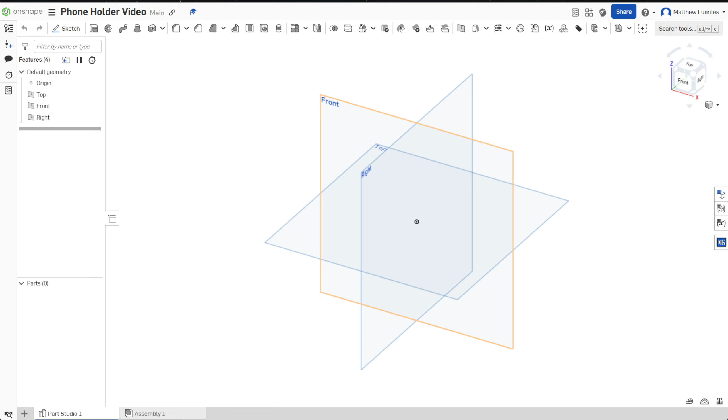But just know that I'm looking at my sketch as I'm making this. So what I'm going to start with is maybe this front plate right here. Let's go back over here, and I'm going to do a sketch on the front plane.

And I'm going to move this so I can see it. I made mine a rectangle. We could go back and edit this later, so we rounded off maybe the edges. But I'm going to start with a rectangle, and I could start with a hole as well in here.

So I'm just kind of sketching what I have there. You have to be a little careful that you don't add too much to your first sketch. In other words, we only want one enclosed area. If we have multiple enclosed areas that we're sketching in here, Onshape's going to get confused. So we want essentially one enclosed area per sketch.

I'm going to show you what I mean by that in just a second. So if you look here, Onshape actually doesn't know what we want to do with this. It doesn't know that this is a cutout. So essentially, I'm breaking that paradigm. If I draw this sketch and I have the cutout in there, it doesn't really know what's the cutout and what's the thing that you want to extrude.

So instead of adding a cutout in there, I'm just going to Control Z and remove that sketch. I'm going to start with just my blank rectangle, and then I'll add the cutout as another sketch in just a moment.

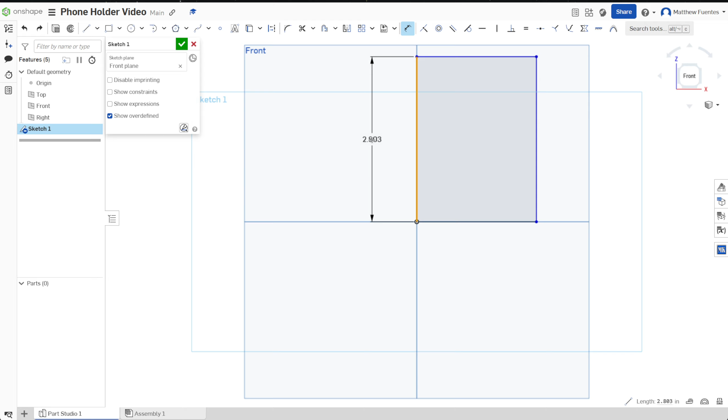So let's add our dimension. I'm going to click the left side. I'm going to move this over here so I can see it. We're going to make this an overall of 4 inches. And I'm going to make my width of this 2.5 inches.

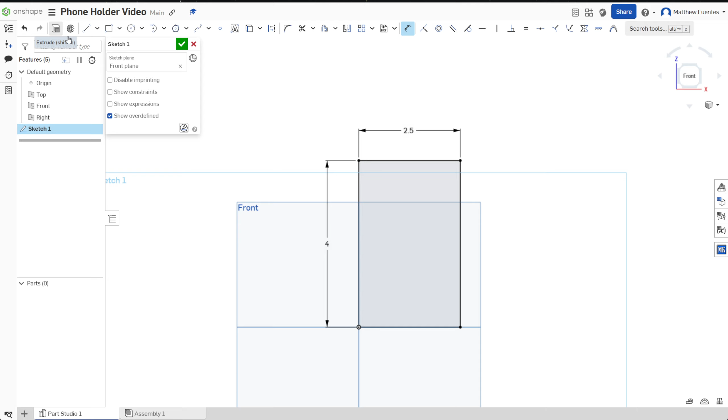Excellent, and I'm going to go ahead and accept that, or I'm just going to be a little bit quicker on it, and I'm going to click extrude. It's going to take that sketch and start the extrusion. Right click and rotate so I can see it. I want it to go back because I want my front plane to be the same, everything to be referenced off that front plane.

So the depth here—this is where I need to think about the plywood that I'm using. I'm going to use 1/8 inch plywood for the laser, so that means the thickness of this is going to be 1/8 of an inch. You don't have to do the math there, you can actually just do 1/8.

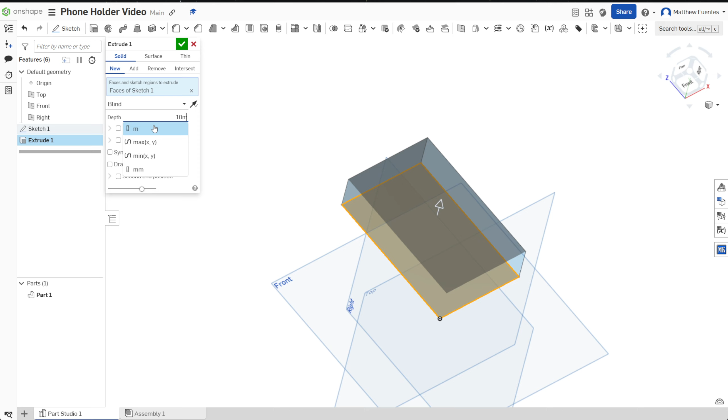If it was in millimeters and you knew the metric, you could actually type 10 mm and press enter, and it would do the conversion for you. That's pretty cool. This is not in millimeters, this one's going to be in inches, so 1/8 of an inch. You could even type the inch there, but I'm just going to do 1/8 because I know it's defaulted in inches.

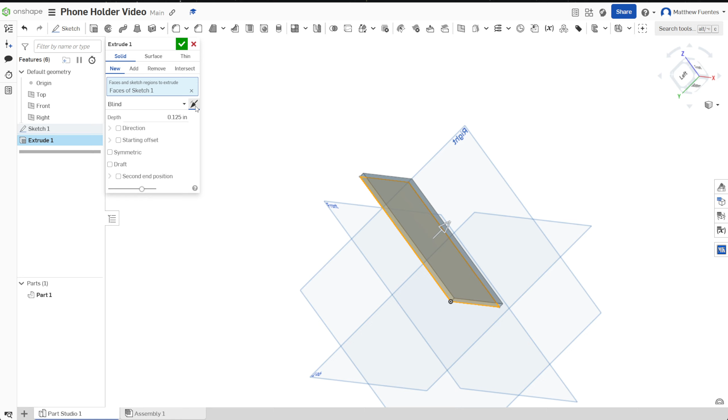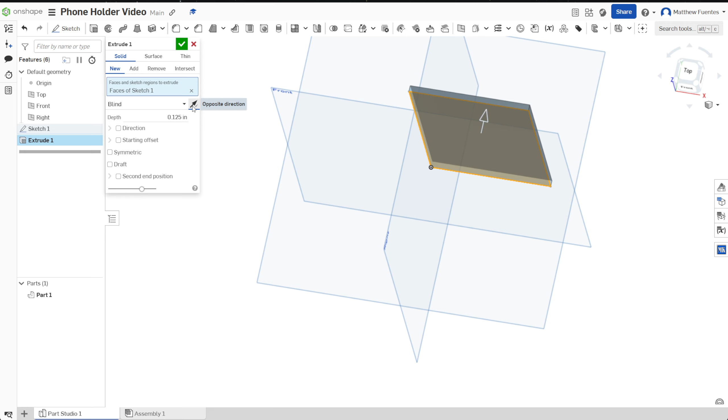Go back, there we go, select it. There it is. Actually I lied, I said that I wanted it to go back, and then I changed my orientation and messed it up. So I'm going to right click on this extrude, edit, change the orientation, click the check. So if you ever need to edit these particular features, you can just right click on them and change them.

So now I want to put a hole in here, basically put a slot. So we need to add in our slot that we've designated right here. So let's do that—I said it's 1 inch from the bottom, and about 1 inch wide is what I specified. So let's see what that looks like.

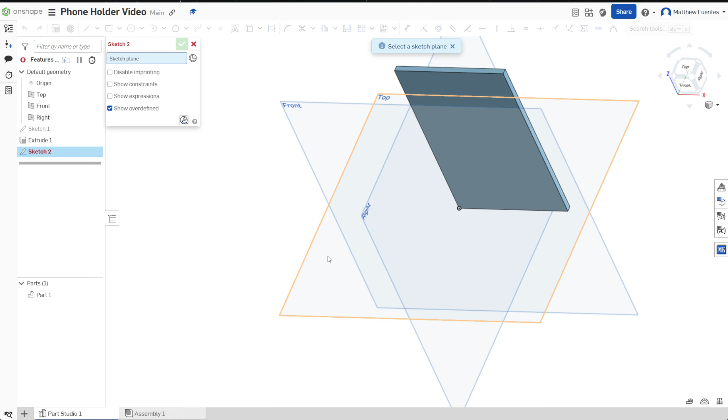So I'm going back here to my sketch. I'm going to actually sketch on the face of my phone holder now. So I'm no longer selecting one of the planes, I'm going to actually select the part to sketch on, and change my view. I'm going to click on the front so it makes it nice and flat for me. And I'm just going to put a rectangle in here.

Just going to throw it down. I didn't pick a location, I didn't pick a dimension, I'm just kind of getting it oriented, and that's going to be my cutout. So one of the things that I already know is that the thickness here will be the same thickness as my plywood, so I'm going to just say that's 1/8 of an inch and throw it in there.

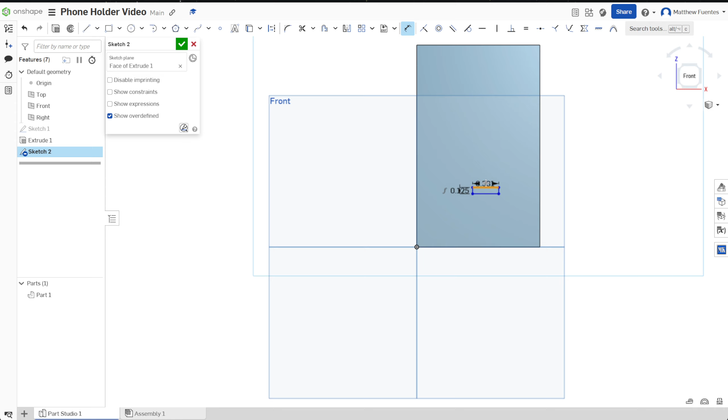I know that my width here is going to be 1 inch, according to what I wrote. So you're probably trying to figure out, okay, how do I get this nice and centered? There's several ways to do this.

In this particular case, it's a bit tricky because we've got this rectangle in space, and the reference is that we want this to be centered on this shape. If you notice, there's a little dot that shows up at the midpoint whenever I hover over this line. So what I'm going to do is make something called a construction line, which helps us in constructing our sketch.

I'm going to go to the line tool, and I can turn on the construction line now, or add it later. Let's turn it on now. I'm going to hover over until I get this little square, which means I'm at the midpoint. You notice in the black icon, it shows me that I'm at the midpoint.

I'm going to drop a line vertically down to the next midpoint. That construction line also has definitions, just like any other line in the sketch. This particular line is fully defined because it's in black. So you're probably thinking, okay, cool.

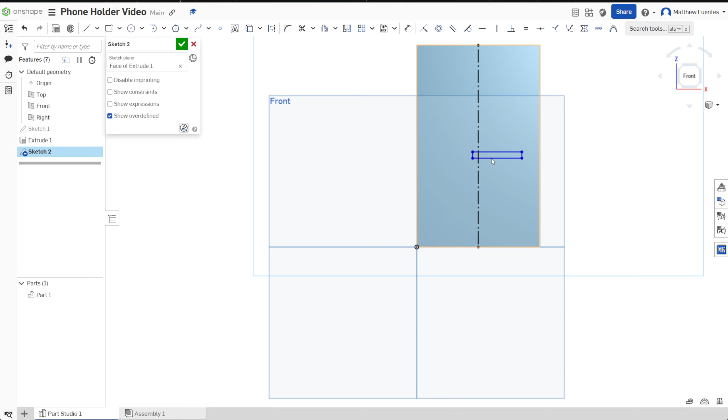So then I can take this rectangle and move it so that it sits at the midpoint. Well, not quite. We can do this a couple different ways. I'll show you one way.

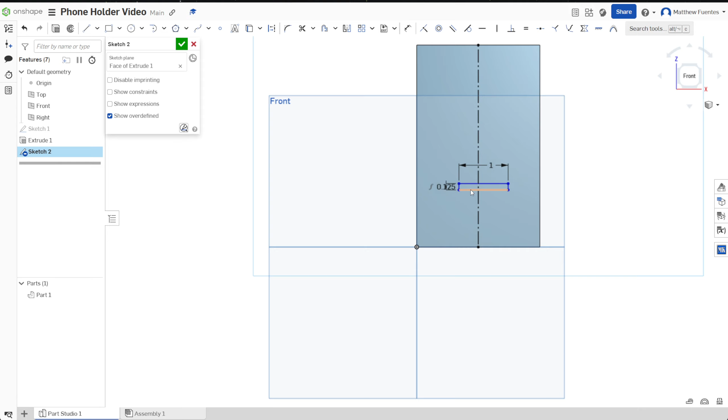I'm going to move this dimension over here. It's bothering me that it's not sitting on the dimension. So one way we can get these two center lines to match up is to think that we want the center line of this rectangle to match the center line of our overall rectangle. Let's add another construction line, center to center.

I pressed escape, and what I'm going to do is click one of these points. Let me zoom in here for you a little bit. Either one of these points or the line—I'm going to click one of the points and drag it until I get this.

See how it changes color? It goes to that kind of yellowy orange color. That just means it's snapping to that, so the point gets connected to the center line. Look what happens when I do that.

Now I'm going to see my constraint. Remember, blue means it's underdefined, so it means we're missing some definitions on defining its location or lengths of stuff in our sketch here.

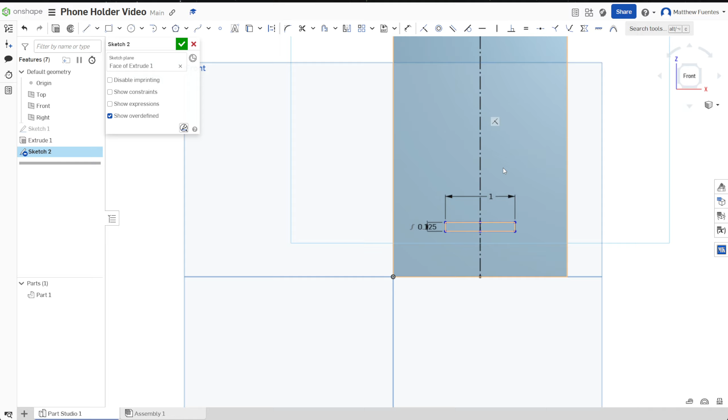So I'm dragging the part around to figure out what's not defined. I can't move it side to side, and I can't change the shape by clicking the corners. But if I click any of the points, the only thing I can do is move it up and down. So I've defined that it lives centered in this particular rectangle, but I haven't defined where it's sitting at.

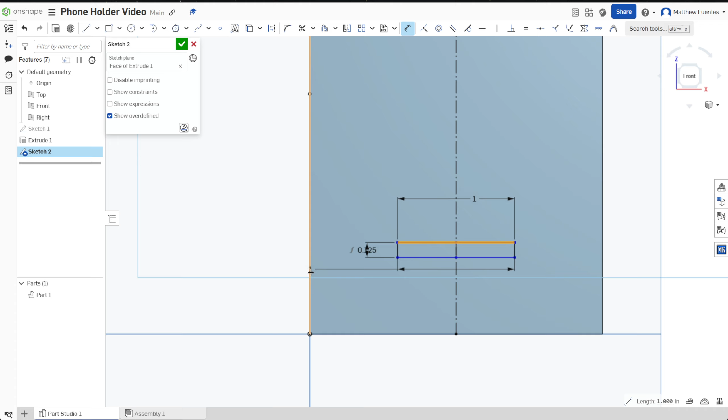If you go back to my original sketch, I said I really want this to be about 1 inch from the bottom. That's what I'm saying down here. So let's do that. My intent is for the bottom of my phone, which is right there, and the bottom of this to be about 1 inch. About 1 inch—there we go. It looks about right. We might want to change that later, but we'll come back to it.

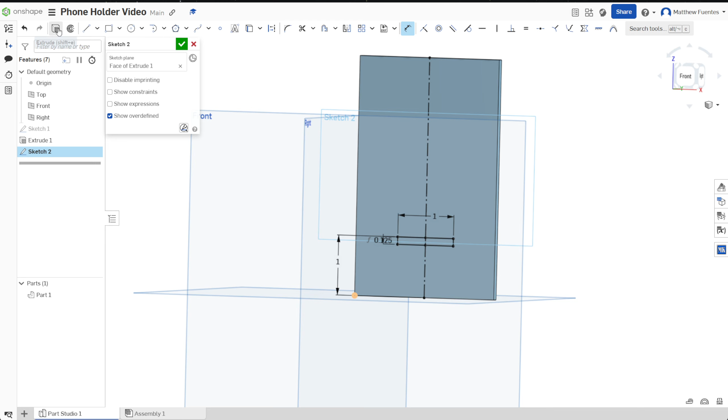Let's go ahead and I'm going to extrude, but this time I don't want that because I can't laser an extra part out. Maybe if I were 3D printing, I would want this, but I'm thinking with a laser, I need to connect things together. Instead of a little lip that sticks out like that, I'm going to make a cut.

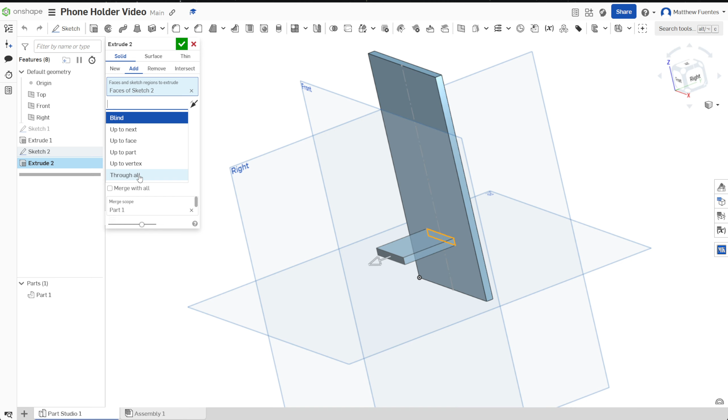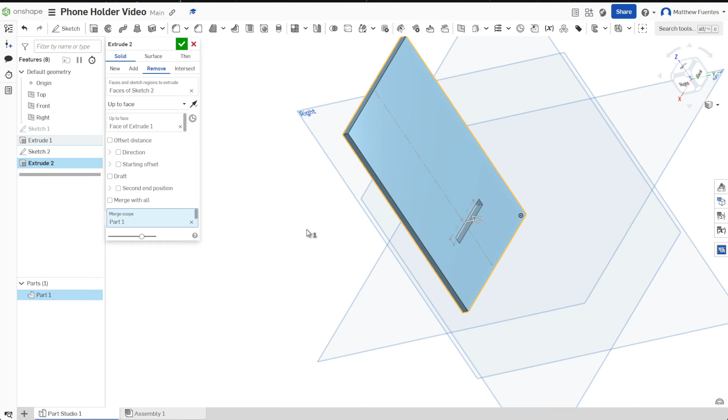I'm going to make a cut by clicking remove, and I want it to go really through all. I could have it go up to the next face and select the face, but that's an extra step I didn't really need to do. So I'm just going to make this go through all, so it would always cut through whatever I put in here, or whatever was there.

So I'm going to click the check, and now I have what resembles kind of my phone holder there. Maybe something I neglected to say early on when thinking about laser cutting this: the stand part of my piece is another part that I'm just going to slide into this.

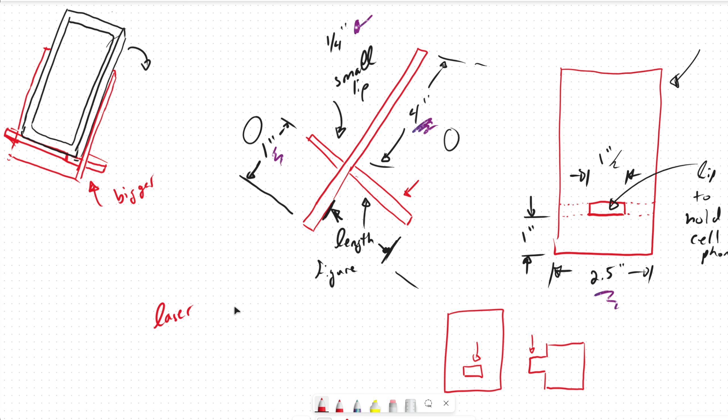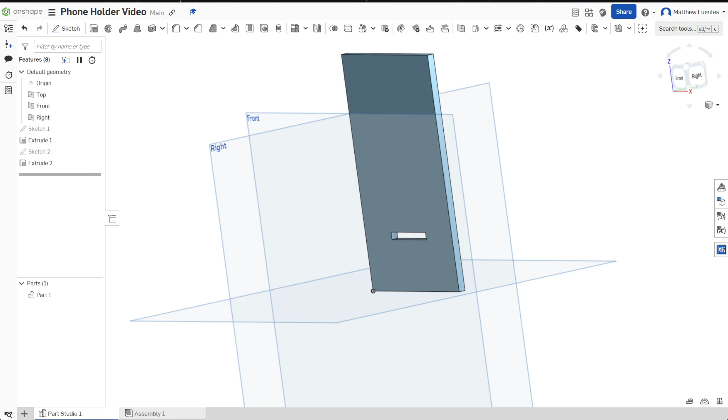Going back here, so I've got my hole cut out. I've got quite a bit of stuff done, so we're in pretty good shape. In our next exciting video, I'm going to take this same design and make the other part, and I'll show you how to do that. Thanks for joining.